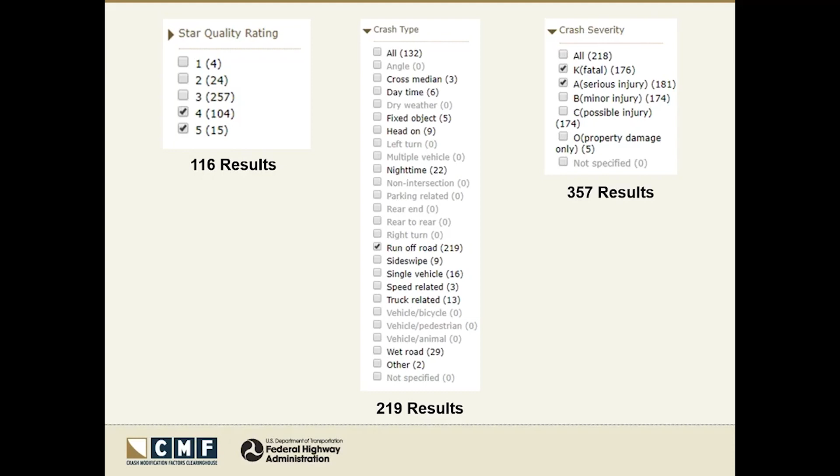Going forward, you may run into instances where you find multiple CMFs for the same crash type and severity in the study. It's very important to understand the differences between such CMFs and how to differentiate between them.

Let's give you an example. Here you can see there are two CMFs for total crashes in the same study for providing a left turn lane on one major road approach in urban areas. To make it easier to identify the difference, if you look at just this search screen, you cannot figure out what the difference is, because they both deal with total crashes with all severities in urban areas. However, there's a difference in points between the two CMFs: one is 0.73, one is 0.76.

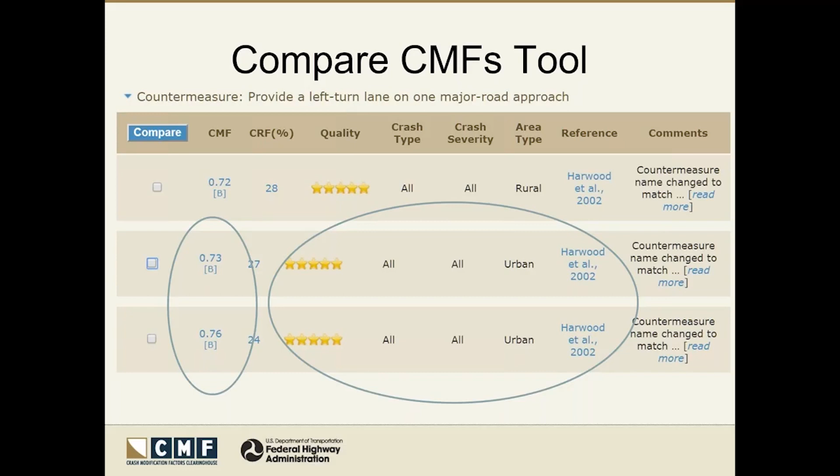You can identify differences in such cases by using the Compare CMF tool available on the Clearinghouse website. To compare, simply check the boxes corresponding to the CMFs you want to compare and hit the blue compare button at the top left portion of your screen. Once you do that, you'll have a screen like this, where the blue highlighted rows identify the differences between the two CMFs.

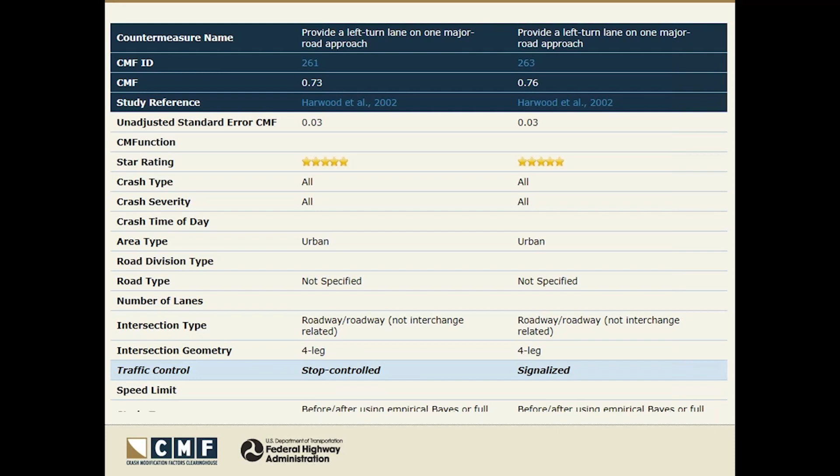In this particular case, you can see that one of the CMFs, for providing a left turn lane on a major road approach, looked at stop control intersections, whereas the other one looked at signalized intersections. So now we know what the 0.73 CMF applies to and what the 0.76 CMF applies to specifically.

In some cases, differences might not be obvious from the data fields available in the Clearinghouse. Rather, you will have to look at the comments box where the reviewer enters important notes about the CMFs.

So now, our third question will talk about calculating the reverse treatment effect. Let's assume a scenario where a study indicates a CMF of 1.48 for a 75-degree intersection compared to a 90-degree intersection. The question here is, what is a reasonable assumption of CMF for realigning an intersection to 90 degrees?

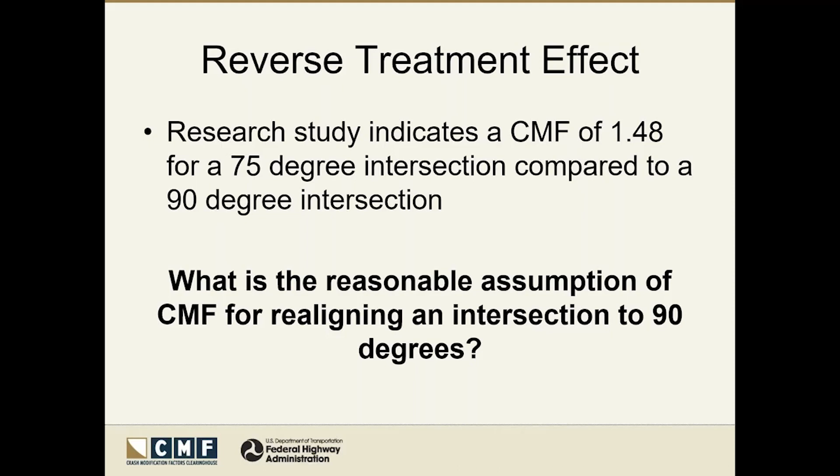Assuming that a 1.48 CMF would lead to a 52% reduction in crashes when an intersection is realigned to 90 degrees, maybe because 2 minus 1.48 is 0.52, is incorrect. It's a mistake.

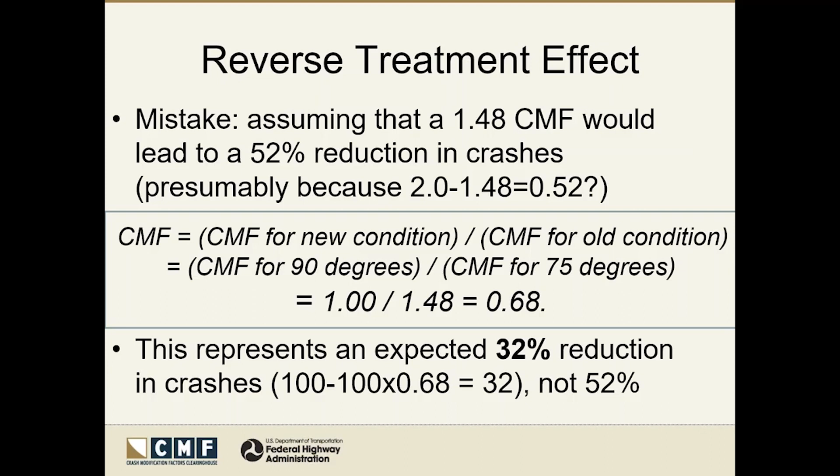The correct way to do it is the CMF is generally calculated as the CMF for the new condition, which in this case would be the CMF for 90 degrees, divided by the CMF for the old condition, which would be the CMF for 75 degrees. So in short, you get 1 divided by 1.48, which is 0.68, and effectively that shows you'll have a crash reduction of 32%, not 52%. We should be very careful when trying to imply the reverse effect of any treatment, and make sure we use the right methodology to do so.

Now let's talk about applying too many CMFs without accounting for interrelationship of effect. Various CMFs in the Clearinghouse address the same crash type. For example, you can have CMFs addressing run-off-road crashes at curves, and there can be various countermeasures that address run-off-road crashes at curves.

That can include chevrons, wider edge lines, or high friction surfacing. Now, of course, these effects are related, but we have to understand that they are not independent of each other. So how do you deal with it when you have multiple CMFs available?

One of the options is you multiply the CMFs together, which would likely end up overstating the benefits of those treatments. So accounting for interrelationship of effect becomes very important.

We can also take a conservative approach where we use the CMF from only the most effective treatment. I won't dig deep into this in my presentation because there's more detailed discussion on this topic coming up in the next presentation, and you'll learn more about how you can combine multiple CMFs to get a combined treatment effect.

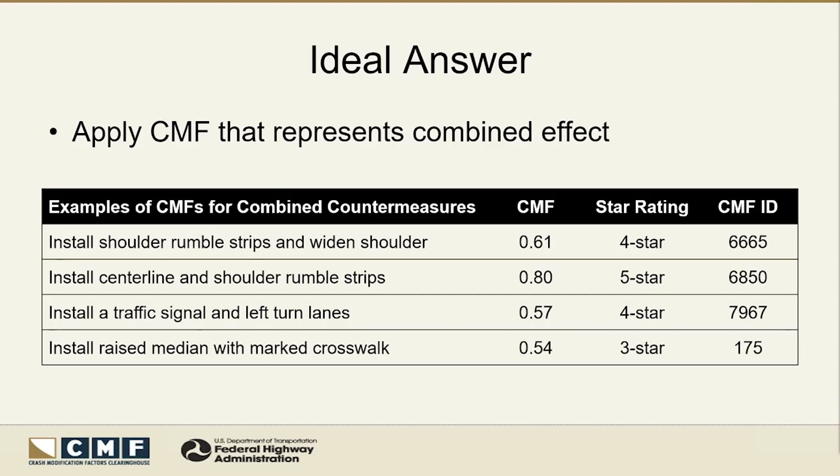In reality, though, we don't always have that ideal scenario, and you may need to use multiple CMFs for the individual countermeasures to estimate the combined effect. As far as I can tell, there are not CMFs available for the combined effect of these individual countermeasures.

If you wanted to install, say, a left turn lane and improve intersection sight distance, you're going to have to somehow combine or use the individual CMFs to estimate that combined effect. So we have CMFs for installing left turn lanes, we have CMFs for improving sight distance, but we don't have one for that combined effect. Really the question is how to estimate that.

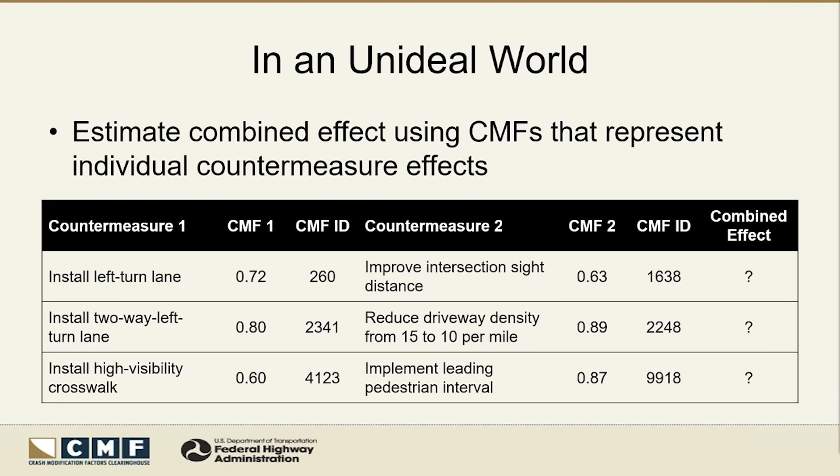There's a number of potential methods to do so, and the Highway Safety Manual suggests the multiplicative method—at least the first edition of the HSM does. The second edition is likely going to include the methods explained in today's presentation and in some other resources. But that multiplicative method was where we started, and it's relatively simple in that you just multiply the CMFs together, but the issue is that it may or may not be a reasonable estimate of the combined effect. So other methods have been proposed and considered, such as the additive method, the dominant effect method, and the dominant common residuals method. These may provide a more reliable estimate depending on the scenario at hand.

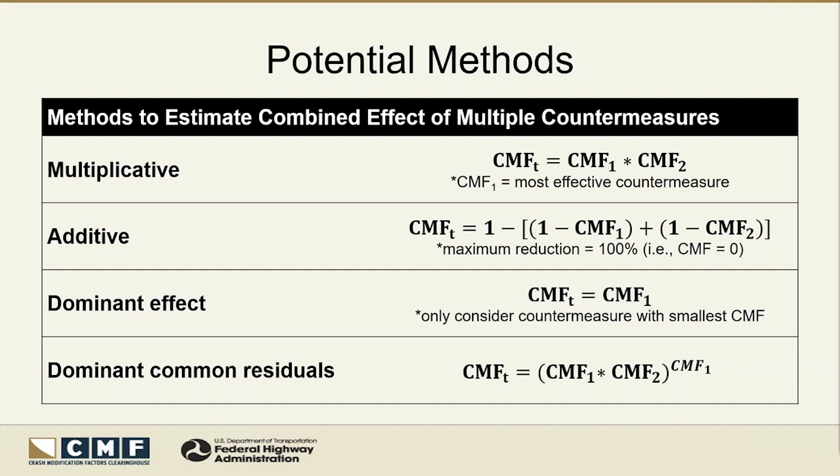So really the million-dollar question here is, when would you select one of these methods over another? I'll walk through a process to help identify and answer that question. Hopefully I can help shed some light on these different methods and when it may be appropriate to apply one over another. To find the most appropriate method, you'll need to follow this 4-step selection process.

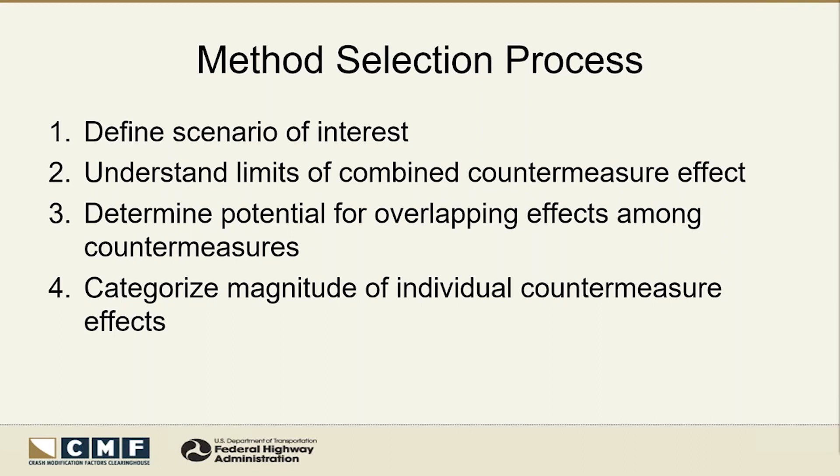The first step is defining the scenario of interest. In doing that, we want to not only define the countermeasures we're going to be using, but consider how they're going to be applied in that scenario. As part of this step, you'll need to define the general conditions, including roadway characteristics and traffic volumes, which help identify an appropriate CMF for those countermeasures. But for each of the countermeasures, you also want to define the target crash type and severity, and the applicable time of day—is this countermeasure applicable during the day, during the night, or both?

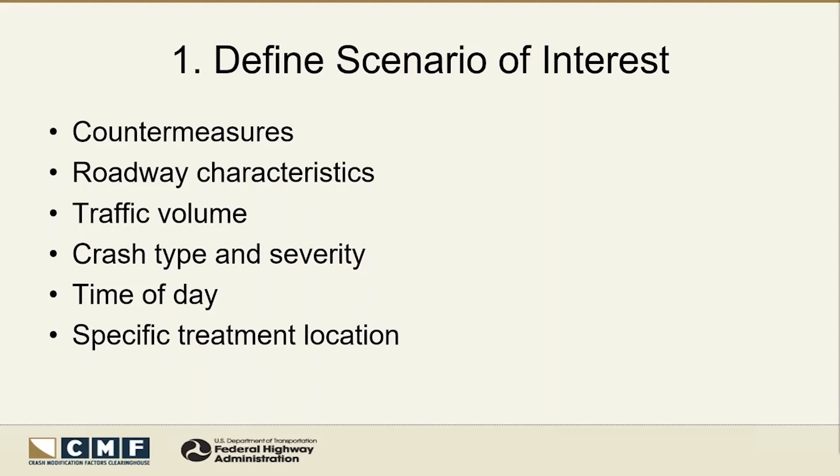And the specific portion of the road where that treatment will be applied - is this countermeasure applicable to the entire location, or for one direction of travel or another? For example, if you were planning to construct a roundabout at a stop-controlled intersection, that's going to impact crashes on all approaches, so that's an entire location impact. But if you were installing a treatment on one approach of an intersection, only for wet weather conditions, that may have a very local impact and not affect crashes on all approaches. So you want to consider applicable time of day and applicable location as well. That's really defining the entire scenario of interest and thinking about how the treatment could impact crashes.

The second part is to understand the limits of the combined effect. I'm representing some different scenarios here with different mathematical equations, and only one of these is incorrect as it applies to multiple CMFs. I'll go through each of these, but as you're looking through them, try to figure out which one may be incorrect when considering the multiple effects of treatments.

In case A, we see that 1 + 1 is 2. That's mathematically correct, and it's also correct in our scenario because you could recognize the full effect of two treatments. So let's say you have two countermeasures, you're expecting the full benefit of both. We would then estimate the combined effect as the full effect of the two. So case A is good to go - that's a correct answer.

In scenario D, 1 + 1 is 3. That's mathematically incorrect - we just said 1 + 1 is 2. But in this scenario, you could have that be correct if two countermeasures enhance the effect of the other. For example, let's say we're considering shoulder rumble strips and shoulder widening. These two countermeasures individually have a benefit, and together they might produce more benefit than the two individual effects combined, because the added shoulder width could provide more recovery room for drivers alerted by the rumble strip. So it may enhance the effect of rumble strips on a narrow shoulder - let's say D is a possibility here.

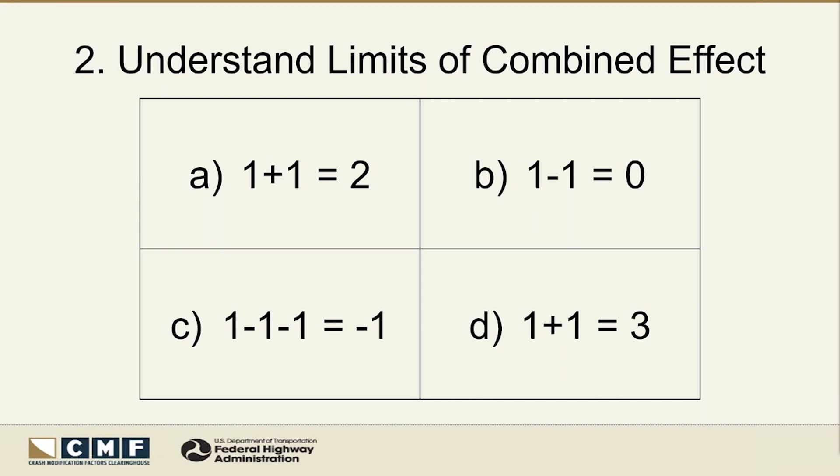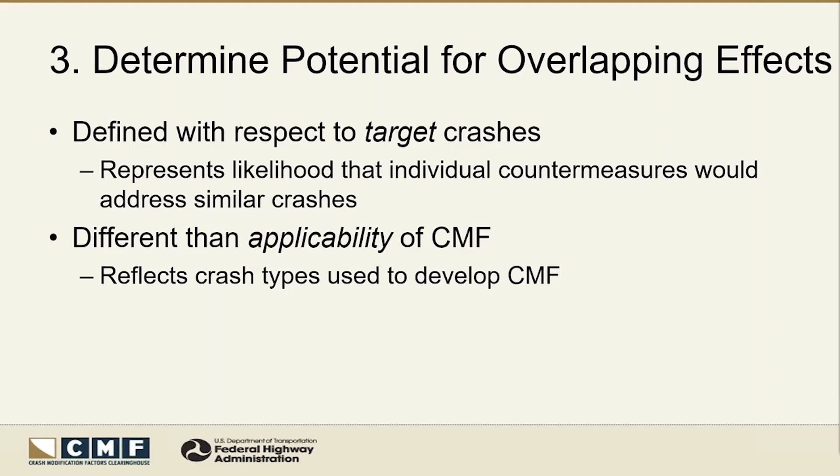Step 3 is determining the potential for overlapping effects, another critical part of the process. The potential for overlap is defined with respect to target crashes, representing the likelihood that two countermeasures would address the same crash types. The important distinction is that this is different from the applicability of the CMF - that's not necessarily the same thing as the target crashes of the countermeasure. I'll go through an example, but keep in mind the difference between target crashes and the applicable crashes related to the CMF.

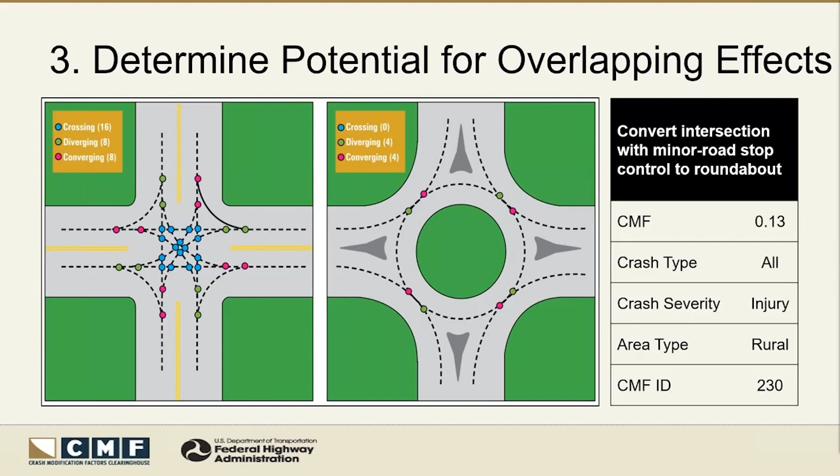In this example, let's say an agency replaced a minor road stop-controlled intersection with a roundabout, and what they're targeting are the angle crashes. With the roundabout, you're still going to have potential for sideswipe and merging crashes, but what you're really doing is hoping to eliminate the right angle crashes. Separately, a researcher develops a CMF that applies to injury crashes - so the applicability of this specific CMF of 0.13 is injury crashes. The target crashes, however, may have been something different, which in this case could be right angle crashes. That's an example of the difference between target crashes and applicable crashes as we move forward.

Continuing with the potential for overlapping effects, in this scenario let's say we're considering lighting on the major road and advance warning signs on the minor road, at a two-way stop controlled intersection. The question here is, do you think there would be no overlap, some overlap, or complete overlap? Think about that for a second. We have major road lighting and minor road advance warning signs.

I think in this case the answer is always it depends, and there's going to be a need for judgment here. But I think it would be appropriate to assume some overlap, because both the lighting and the advance intersection warning signs help alert drivers, at least those on the minor road, to the presence of the intersection at night. However, the signs will also alert them during the day, and the lighting would also have some impact on the major road. So they're probably not going to completely overlap, but there's likely some overlap here, and I wouldn't expect the full benefits of each because of that potential for overlap.

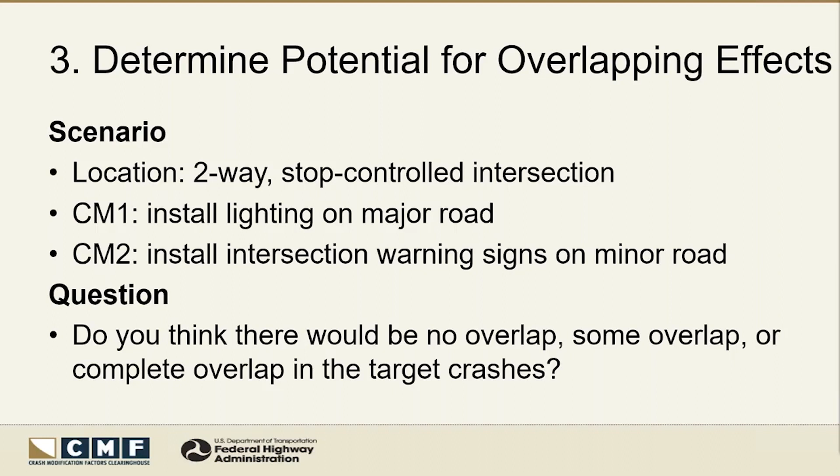So zero overlap represents two independent effects, and you're going to expect the full benefit of each countermeasure. That's what the multiplicative method assumes in the Highway Safety Manual - that the two treatments are independent, we can assume the full benefit of each, and we move on.

Complete overlap is when you have two non-independent effects, and the second countermeasure is really targeting some or all of the crashes that the first countermeasure was addressing. So if you widen the lanes and widen the shoulders, you may be targeting the same runoff road and opposite direction crashes - in that case there may be complete overlap.

I think in many cases you're going to have some overlap, and that's when both countermeasures provide a benefit, but the second countermeasure may have a reduced benefit because the first countermeasure had already addressed some of the target crashes. So let's say we installed a cable median barrier and shoulder rumble strips on the left shoulder or the median shoulder of a 4-lane divided highway.

In this case, the cable median barrier and the inside shoulder rumble strips would both target cross median crashes. But there may be some added benefit here because the shoulder rumble strips are also going to target the runoff road left crashes that would not have resulted in a cross median crash.

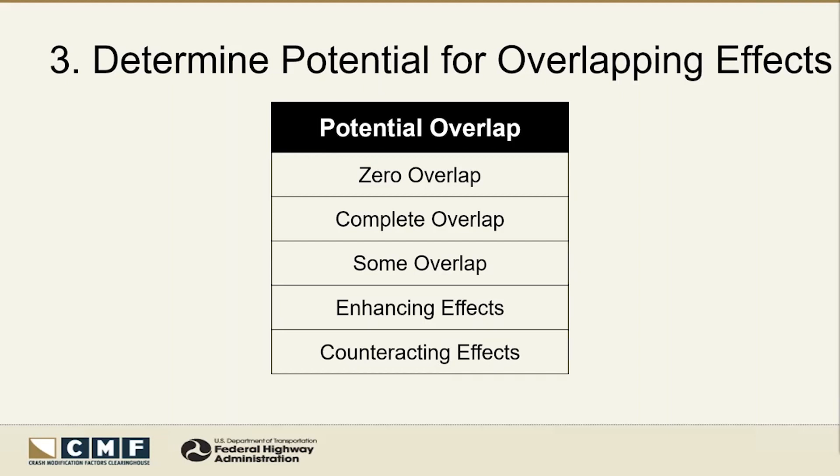But on the contrary, you could also have counteracting effects, which is where one countermeasure negates the effect of the other. Let's say it's not necessarily a countermeasure, but we were faced with a design exception and had to reduce the radius of a curve, but then we installed advanced curve warning signs and chevrons to counteract that - I would consider those counteracting effects. So keep those in mind as we move forward.

Here's another example of that. So we have two scenarios here, but to determine the potential overlap, you really have to consider the crashes and the locations that are targeted by the countermeasures. There's going to be more potential for overlap if the individual countermeasures either target the same crash types or are applied to the same locations.

So again, take the example on the left: if you were installing advanced intersection signs on the side roads and improving sight distance by trimming the vegetation in all four corners, then there's likely a high potential for overlap, because both treatments target similar crashes and they're targeting the same approaches as well.

In this scenario, let's say you're considering two improvements on a multi-lane divided highway. If one of those improvements is a cable median barrier, that could impact crashes in both directions, and those would be your cross median crashes. Let's say you were also considering widening the clear zone on the south side. That's pretty much going to target the run-off-road-to-the-right crashes for vehicles traveling from left to right. So there may be reason to think there's pretty good independence between those two countermeasures because they're applied to different locations.

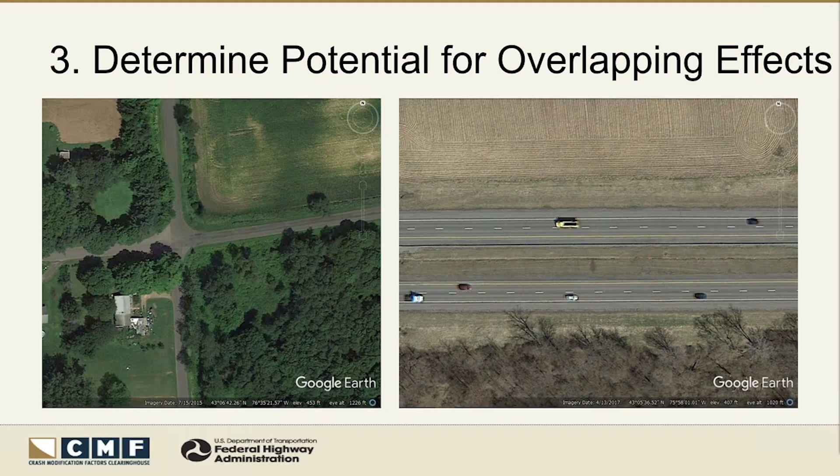So the last step of that four-step process, before I get into the methods more, is categorizing the magnitude of the individual effects. This doesn't have a huge impact on the method you select, but it's something to keep in mind. Depending on the magnitude of the individual effects, the method you select may have a nominal or significant impact on the combined estimated effect. If both countermeasure effects are relatively small, say a 5% change in crashes for both, whatever method you select probably won't make a huge difference. But as effect size increases, methods tend to produce much different estimates, and it becomes more important to select an appropriate method.

At this point, we've considered the potential for overlap, we've defined the magnitude of effects, and now we can use this table to select an appropriate method. This table assumes the CMFs apply to the same crash type and same crash severity. If they don't—if one CMF applies to total crashes and the other applies to, say, fatal and injury crashes—there's a different process we need to use, and I'll explain that in a bit. But let's assume we have two CMFs and they both apply to total crashes.

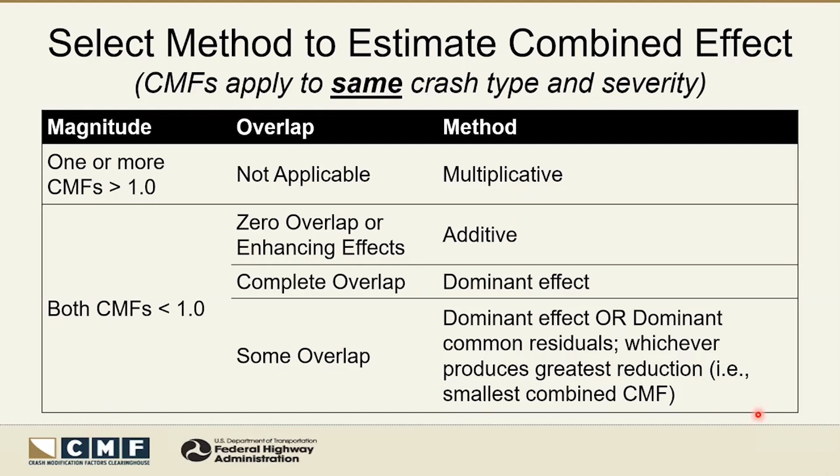Now, the dominant effect method tends to work well when both effects are large. That's not the case here—they're 0.8 and 0.89, I think. But let's see how this would play out. I'll go back to the next slide if I can do that.

In this case, the dominant effect method would select the CMF of 0.8. The dominant common residuals method, if we apply the equation, is CMF1 times CMF2 raised to the power of CMF1, where CMF1 is the larger reduction, so that's the 0.8 here. Applying that method, we get a combined effect of 0.76. Since 0.76 is a larger effect than 0.8, I would take the result of the dominant common residuals method and use that as my combined effect. That's how the selection process works.

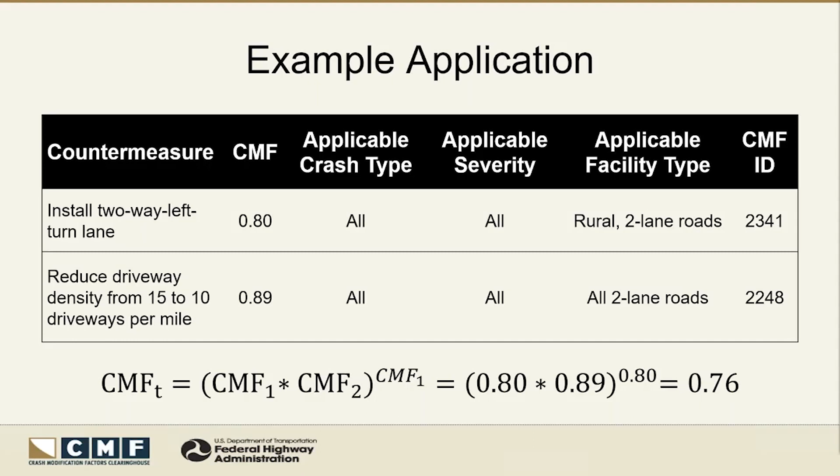So if the CMFs apply to different crash types or severities, you'll need to use this 5-step process. I'm not going to go through this in detail, but there are some additional resources that can help you out with this. The key is really to apply each CMF individually to any crashes related to that CMF. And if there are any crashes related to both CMFs, you would figure out which method to use from the previous table and apply that CMF to the overlapping crashes.

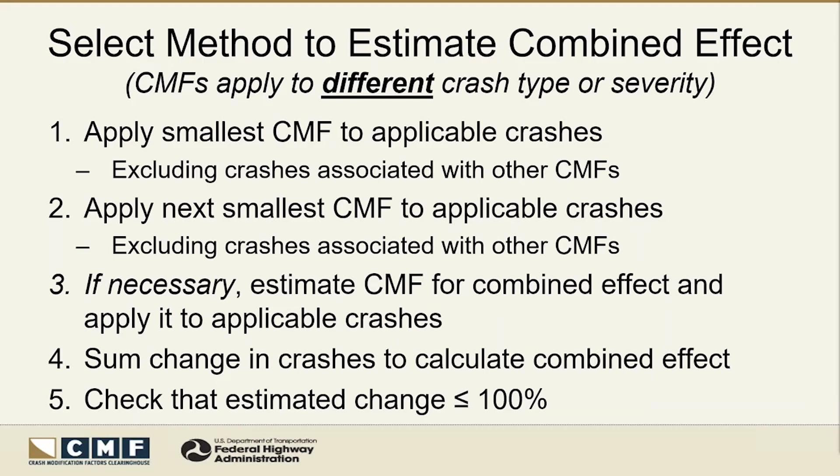I think an illustration might help explain that better. In this first graphic, the outer rectangle, the thick black rectangle, represents the total crashes for our site. We can divide those crashes into subsets or crash groups. In this case, we've divided into 2 crash groups, 1 and 2. Let's say CMF1 applies completely to crash group 1, CMF2 applies completely to crash group 2. We would apply those CMFs in parallel to those individual crash groups, and then combine the results at the end.

So let's say numerically, for an example, the total crashes at a location were 9 total crashes, broken down into 3 crash groups. Crash group 1 was 3 cross-median crashes, crash group 2 was 4 runoff road right crashes, and crash group 3 was 2 sideswipe crashes. We have our 2 countermeasures, countermeasure 1 and countermeasure 2. The CMF for countermeasure 1 only applies to the cross-median crashes. The CMF for countermeasure 2 only applies to the runoff road right crashes, and neither applies to the sideswipe crashes.

So what we would do is, just like applying any other CMF, we apply the CMF to the applicable crashes. The 0.87 is applied to the 3 cross-median crashes. The 0.93 is applied to the 4 runoff road right crashes. There's no CMF for sideswipe, so we assume no change in those crash types. We're just left with the 2 sideswipe same-direction crashes that were there before. So those are the crashes with treatment.

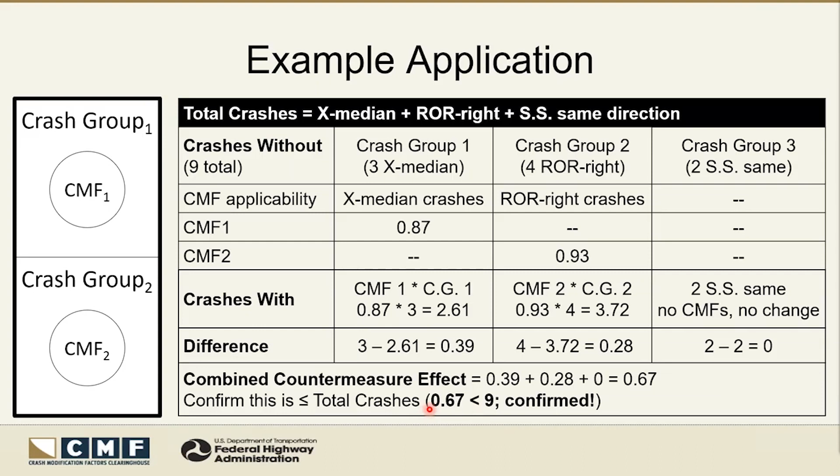0.67 crashes per whatever the study period may be. Again, the last thing is to confirm that that combined effect is not greater than the total number of crashes, which was 9 crashes. In this case, we're good. We assume a combined effect of 0.67 crashes, and we can carry on with our analysis.

All right, so just to wrap up, let's revisit the questions we started with. The first question: can you use CMFs to estimate the combined effect of multiple countermeasures? The answer, I think, is yes, but ideally you would use a CMF that represents the combined effect. Assuming that does not exist, then follow the process that we went through here to select an appropriate method and apply it accordingly.

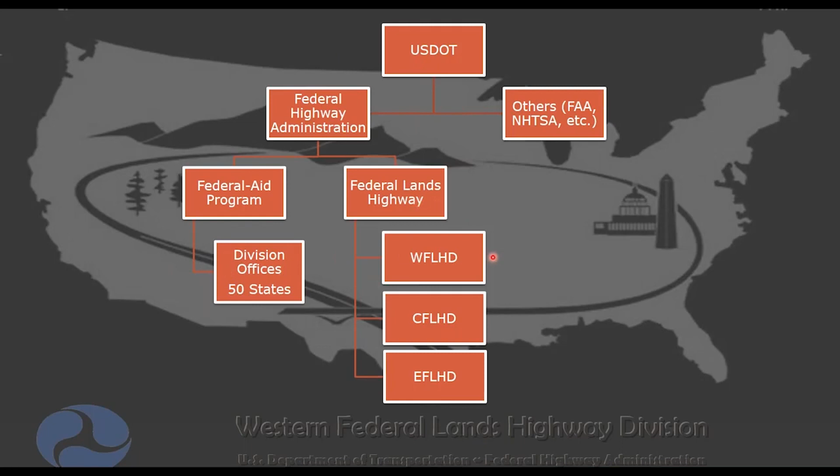So you can see here—my laser pointer out—we're under U.S. Department of Transportation, so others like FAA and NHTSA, Federal Highways. We have the Federal Aid Program that a lot of you are familiar with through the division offices. And then Federal Lands Highway has three main branches: Western, Central, and Eastern Federal Lands.

So where and who we work with: the programs our agency administers give us a wide variety of project partners. As you can see, the historic core of our program has been with our federal partners at the National Park Service, the Forest Service, and others such as the Bureau of Land Management and Fish and Wildlife Service.

In recent years, we've taken on more projects with fellow state DOTs and local agencies through the Federal Lands Access Program. So we have a lot of similar challenges when it comes to improving safety, as many of you face, with questions of how to improve safety for some very low to low ADT roads, very mountainous, rugged, and hazardous terrain, and lots of competing interests for transportation funding. We also have very context-sensitive challenges in some locations where the aesthetics and preservation of the nature of the land is very important.

So moving on to how we are using crash reduction factors here at Federal Lands. We'll talk about the CRF spreadsheet we use, how we use it to calculate the preliminary and final CRFs, while promoting proven safety countermeasures to drive safety improvements.

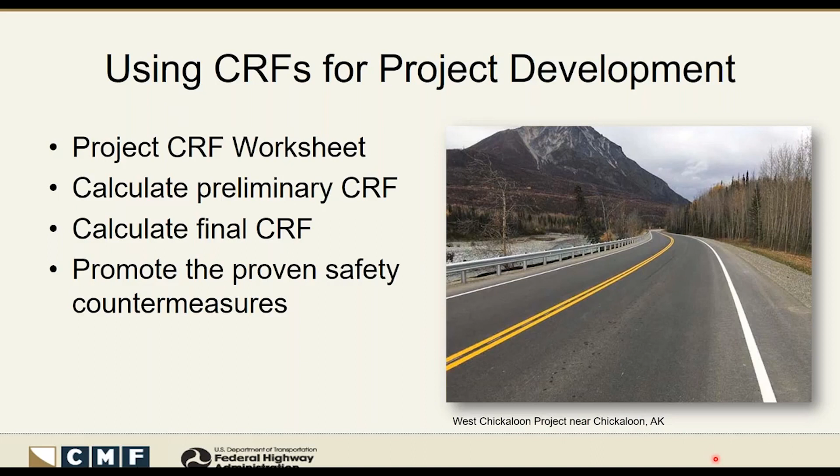And you've probably already noticed we use the CRF terminology a bit more here at Federal Lands. It's easier to communicate with others when talking about crash reduction with people who may not be as familiar with CMFs and the like.

Similar to what some or many of the state DOTs out there use for their highway safety improvement program, we have a list of our most commonly used CRFs included in our worksheet. The list is based primarily off the CMF Clearinghouse, but also includes other sources such as the desktop reference and Federal Highway's Every Day Counts literature.

We've strived to be consistent on the types of crashes and severities of crashes that the CMFs apply to, with a goal to have the total project CRF apply to all crash types and all severities. As many of you know, there isn't always the ideal CMF you're looking for as far as type and severity. So it's not perfect, but it is serving a purpose for our agency here.

So we calculate an improvement CRF for each improvement type on the project. I've got a hypothetical project shown here with our spreadsheet. For this project, we are looking at installing advanced curve warning signs, and we have the CRF shown here, which should be shown in a percentage. We expect a 30% reduction here for installing advanced curve warning signs.

And we apply a basis of length so that we can calculate an improvement CRF and then apply that to the total project. For this case, we're estimating that the curve warning signs on this project will give a crash reduction of 2.3% overall for the project.

Each applicable project safety feature is input into the worksheet, and the resulting total CRF for the project is determined based on the top three most effective CRFs.

Following Frank's presentation here, we're going to maybe want to complicate our spreadsheet a little bit. We were joking about that here in our room locally.

But each applicable project safety feature is input here. And so we've also added in the safety edge for this project for the whole length of the project, which results in an 11% reduction in crashes.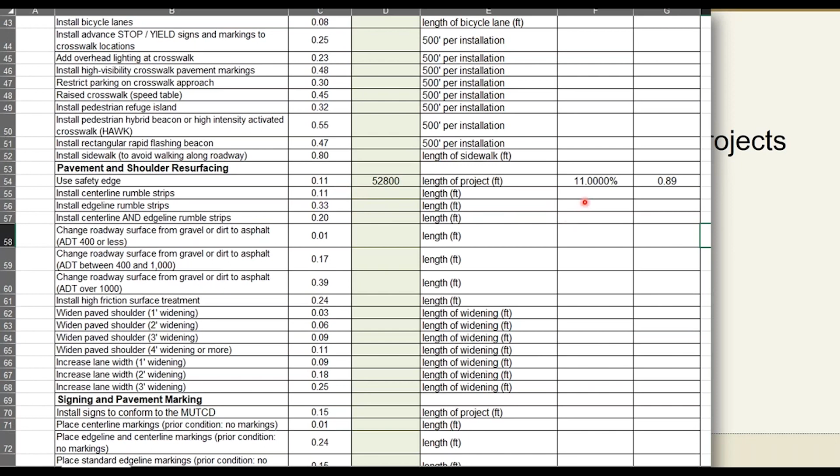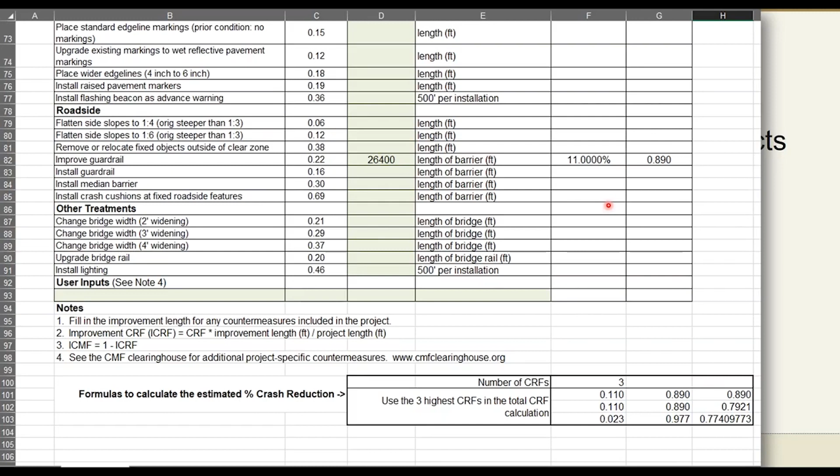And lastly, we have an improved guardrail CRF as well, for which I just put in half the project here, so 22% becomes 11% here for the project improvement CRF. Again, the top three CRFs are used to calculate the resulting total CRF. In this case, I just have 3 entered, and our resulting total project CRF becomes 22.6%.

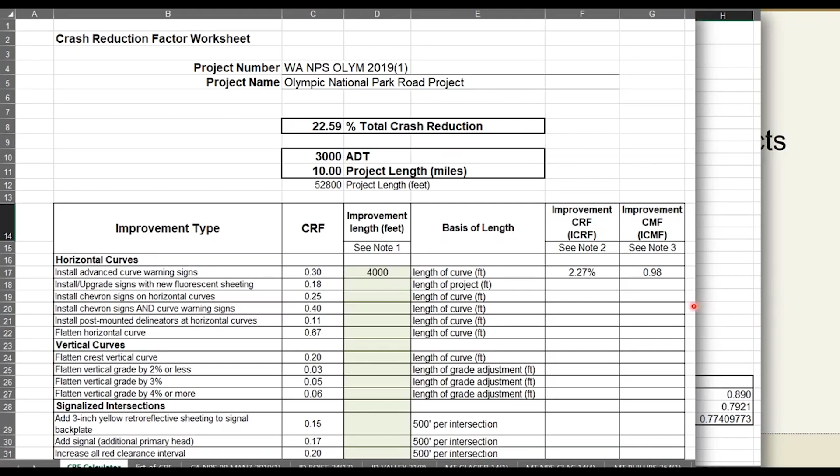And like I mentioned, we'll be taking a look at Frank's presentation and seeing what we may want to take and use here to improve this process. But we'll see how this has been beneficial for us as it is.

So when are we calculating the project CRFs? First, we want to calculate the project CRF as we develop the preliminary engineering milestone, typically a 30% plan set. Our safety engineers provide early recommendations for safety features to be included with our projects based on the project's traffic, existing safety concerns, the proposed geometry and roadside design, and context of the roadway.

Even if exact areas of barrier and, say, the use of warning signs are not fully developed by 30%, or it's known that the alignment may shift some, the preliminary project CRF is estimated to help show the relative effect that the project will have on reducing crashes.

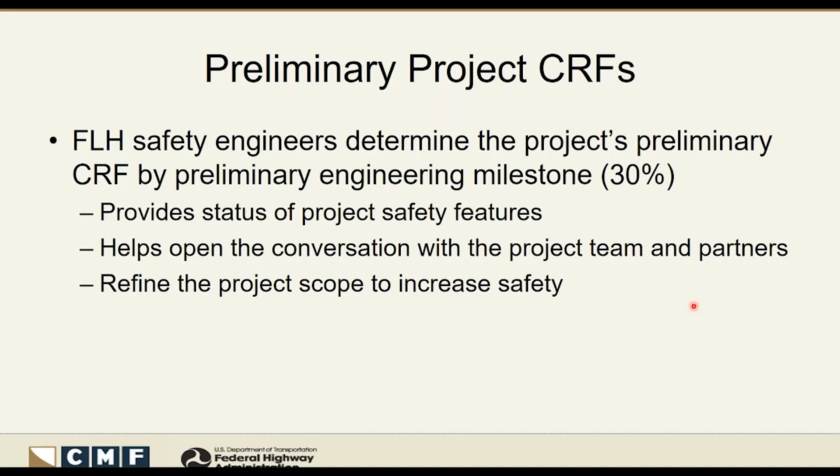By calculating the project's preliminary CRF and including it with the 30% milestone review documents, our project team and our partners, such as the National Park Service, Fish and Wildlife, state DOTs, or counties, can have a productive conversation on how the project is helping reduce crashes and identify further countermeasures or other ways to improve safety and operations on our projects.

After project development is complete, our safety engineers update the crash reduction factor worksheet to determine any differences from the preliminary countermeasures. The final project CRFs then get used to determine our business measure. If a safety feature dropped out of the project unexpectedly, we can review why this happened and see how we can prevent that from happening next time.

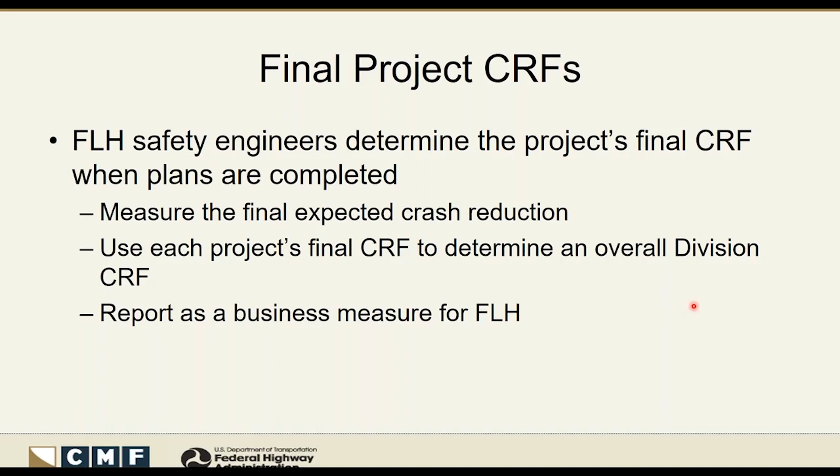So now I'd like to go over how we are looking at our project CRFs at a program-wide level. For a number of years now, we've had a business measure at each of our 3 divisions to track our overall crash reduction factors. In order to combine each project's crash reduction factor, our team has recently begun weighting the CRFs based on factors intended to get a sense of the exposure of the project to the traveling public, so that projects that are longer and have higher traffic have a more significant effect on our total weighted average versus shorter projects with lower traffic.

We do this by using the project ADT, length, and the project CRF to get a sense of its exposure, and you can think of that as being similar to calculating a crash rate.

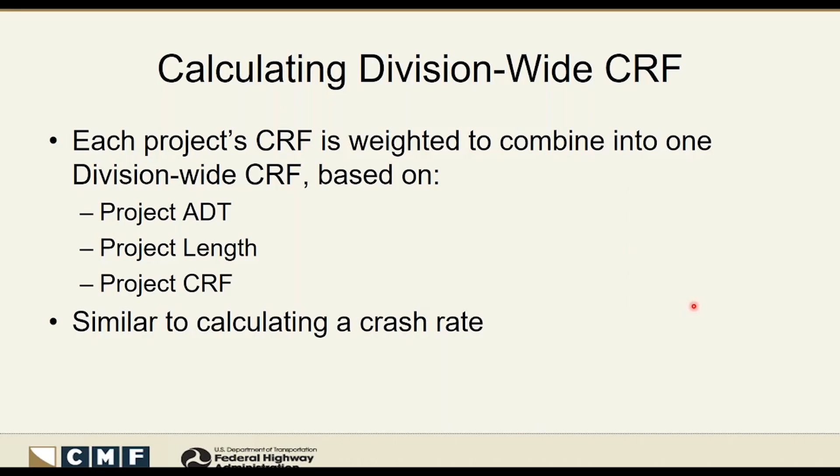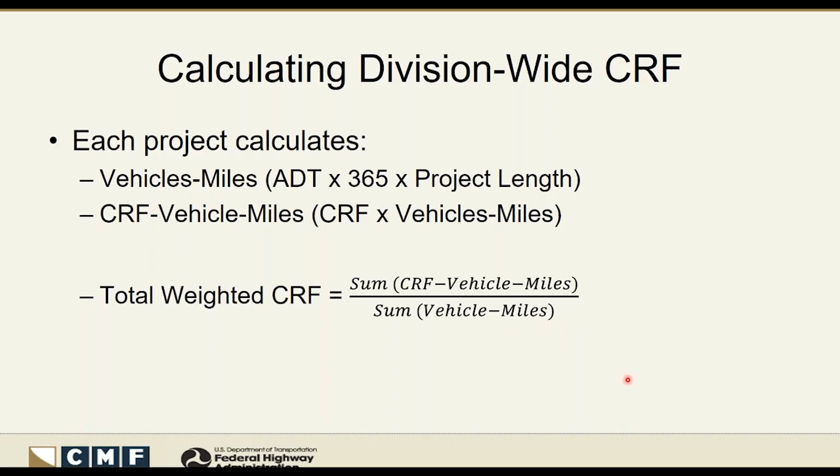So this is what that looks like. We multiply the project ADT times 365 days per year times the project length to get a vehicle miles value. Then we multiply the project CRF times the vehicle miles to get that overall CRF vehicle miles value. To get the overall weighted total CRF, we sum all the project's CRF vehicle miles factors and divide by the sum of the vehicle miles factors. And the resulting number is then the total program crash reduction factor.

There are some projects that we do not calculate the CRF for due to the nature of those programs. For example, our emergency relief for federally owned roads, ERFO program, typically limits us to restoring the original conditions before the disaster, so safety improvements are rare in those cases. Some of our other projects may be parking lot enhancements or geotechnical stabilization projects, so traditional safety improvements are generally excluded from those as well.

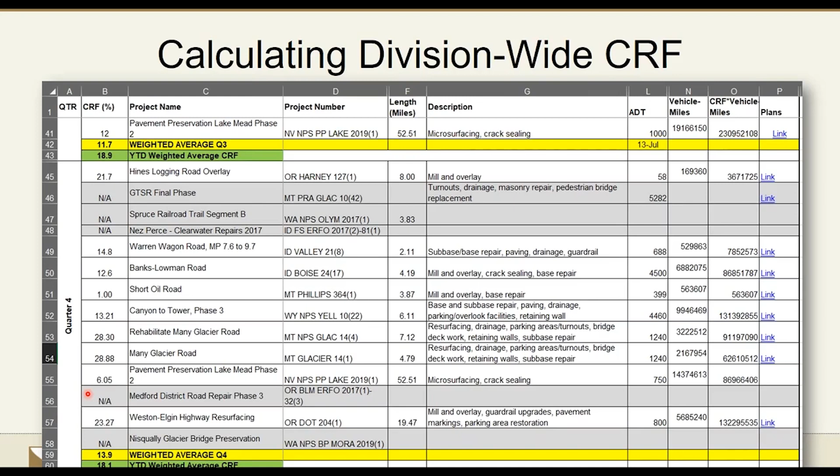So for fiscal year 2019, our division surpassed our goal of a 15% overall crash reduction factor due to the exposure of our biggest project on US 20 in Oregon with 17,500 vehicles per day and a larger CRF with multiple safety features on the project. That project allowed us to meet our goal itself. Without it, it would have been a 7% swing downward last year.

So in summary, there are, of course, some advantages and disadvantages to note with our approach to using CRFs to determine a program-wide factor. On the positive side, it's a reasonable method to track our safety improvements and help drive additional safety features during project development. By getting the safety countermeasures identified early in the development process, we have time to consider adding countermeasures before the project scope is fully locked down.

Once the individual project CRFs are determined, it's just a matter of organizing the data in spreadsheets to calculate an overall division CRF based on the weighting factors. So the weighting and combining part is pretty simple. This approach provides our agency's leadership with a business measure that helps acknowledge the work our agency does to improve safety on our projects and support Federal Highways goals. We can also filter the projects by our different program types or project types, such as rehabilitation versus reconstruction, to demonstrate how well we are doing with those programs or types of projects.

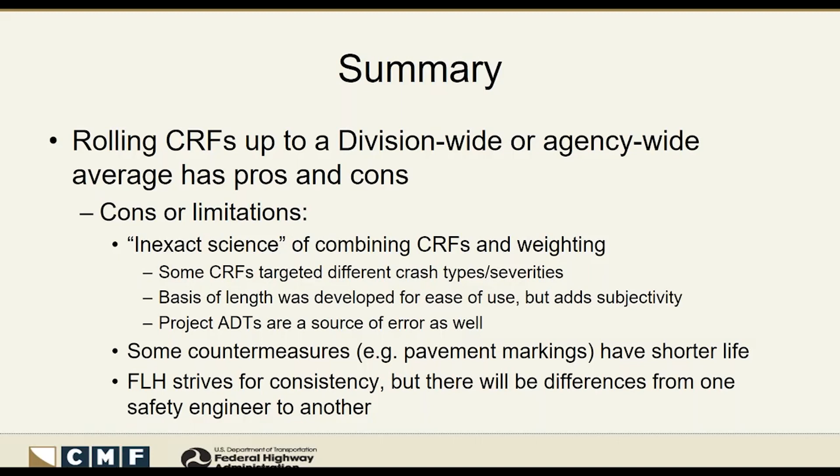Other challenges that some of you likely face are that some important countermeasures, like refreshing pavement markings or replacing with more durable markings, have a shorter life and require maintenance, something this isn't taking into account. It can be a challenge to determine how much credit to give for safety features like pavement markings, especially if the road already had some degree of pavement markings before the project. Finally, we try for consistency in our approach to calculating the project CRFs, but there will always be some differences from safety engineer to safety engineer when determining the project crash reduction factors.

So lastly, I'd like to turn it around and at the end of today's webinar, ask the audience for feedback on this approach for calculating an agency-wide weighted average crash reduction factor. We're certainly curious to know if anyone out there is doing something similar, to understand how your agency's projects are improving safety. Maybe it's at a district level, a region level, or maybe you've rolled it all the way up to a statewide level. And if so, how do you do it, and are there any best practices out there?

We'll be looking at some of what Frank had gone over in the presentation preceding mine and seeing how we can improve our method here while still trying to make it a practical way to compare CRFs across our projects and ultimately measure how our program is doing.

So overall, using CRFs is one way our safety team at Federal Lands Highway is working towards Federal Highway's goal to reduce transportation-related fatalities and serious injuries across the transportation system.

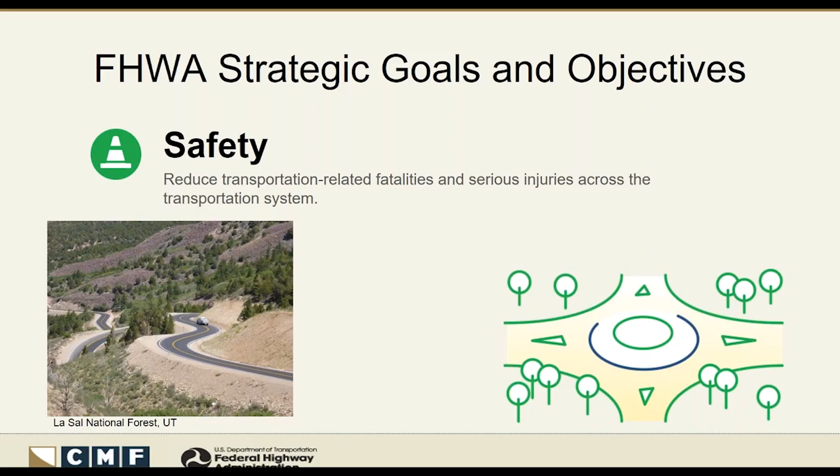I'll be happy to take any questions at the end of the webinar and welcome feedback on our approach to using CRFs. That's all I had.

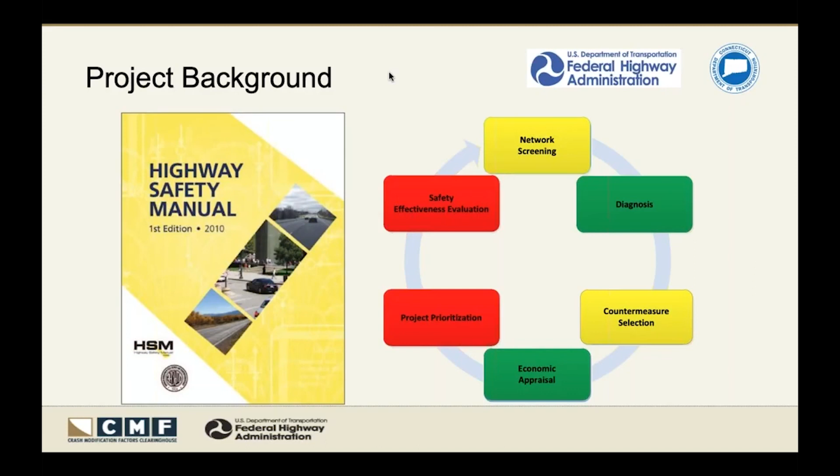As a product of this project, our team has developed a web-based application called the Connecticut Roadway Safety Management System, or CRSMS.

This is the interface of the first analysis module, network screening. Generally all the modules look like this - you'll see this further when I start demoing some of the components. Here you can see we have two major components: one is the data management component, which we use for processing the input data so it can be used for further analysis. The other is the safety analysis component, which has the 6 modules from network screening all the way to safety effectiveness evaluation.

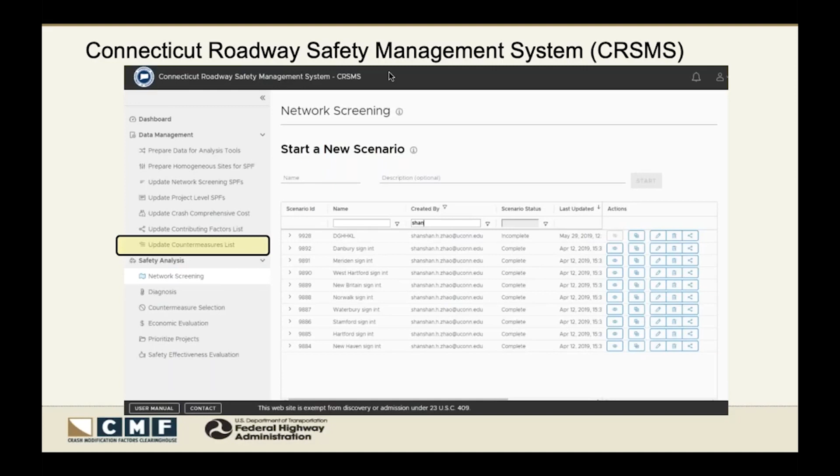For today's presentation, I'm going to focus on how we have managed to use the CMF Clearinghouse data and the API to keep our CMF Clearinghouse data in our database up to date, and how we have been using this data in the analysis.

As we mentioned earlier, before we can select any countermeasures that might be helpful to reduce crashes at a location, we need to figure out where the most critical locations are on our roadway network - those with the high potential for safety improvement. That's what network screening is doing.

After we figure out the high potential locations, we want to dive into those locations and take a look at the crash patterns, what might be the factors contributing to them, and what might be the safety issues at those locations. Once those are identified, we can move on to the CMF Clearinghouse or other sources of countermeasures that the agency usually considers, and compare and select the countermeasures that make the most sense.

So in our tool, we have this network screening module and countermeasure selection, diagnosis module built. This is just a screenshot of the result of a network screening scenario analysis. You can see we'll be able to show the top 250 sites with high risk potential for safety improvement, ranking them from high risk to low risk potential in your network, and show where it is and display the roadway condition at a particular location on the map. I'll show a result like this.

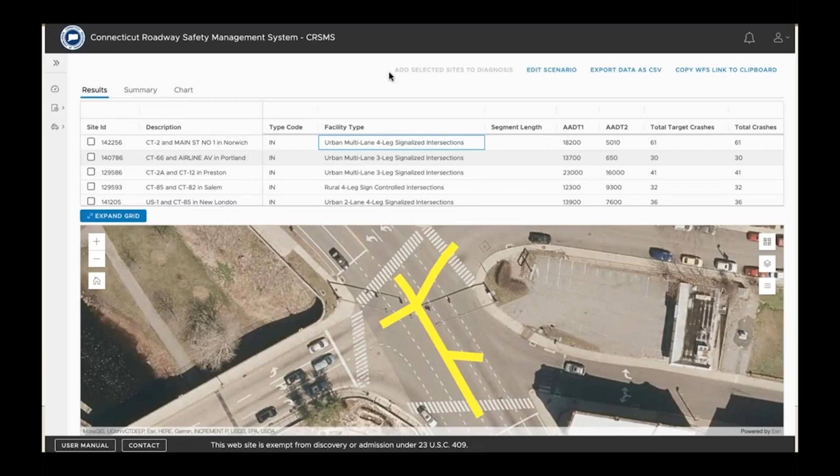So this is basically the end result of network screening. You'll get a list of locations with high risk potential for safety improvement, and it will allow the user to proceed ahead with any of those sites and further diagnose what's going on at those locations. And that leads us to the second module, the diagnosis module.

So we have provided several tools. You can see that in the middle of this page there are several tabs. One is the map showing the locations of the crashes at this site. For this particular analysis, it is a roadway segment running on I-84 between mile post 77.79 and mile post 80.74. You can see how many crashes are there and where they are located on this map.

In the other tabs, for example from the crash data tab, you can take a look at each crash individually. Basically any information related to the crash in the crash report, you'll be able to see it there. Other tools as well: crash summary statistics, test of proportions, collision diagram, crash tree. So all those are the tools that we've provided to the user of the CRSM system to facilitate with diagnosis.

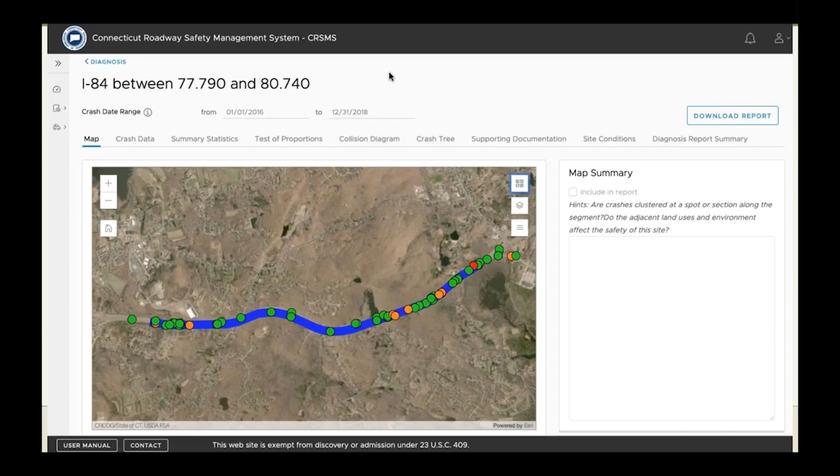So at the end of this module, the diagnosis module, the expected result is that the user should have gotten a good idea of what the issues are at this location, what crash patterns are there, and what might be the factors that contribute to those crash patterns. So with those questions answered, the user is ready to move on to the next module, which is the countermeasure selection module, and it is the one that I wanted to focus my demo on.

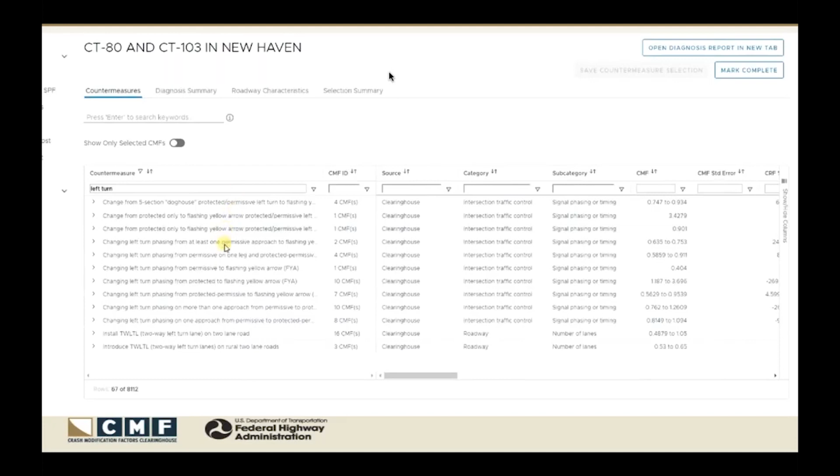So now with a shorter list, we'll be able to go over the countermeasures available and select the ones that we think are most appropriate to apply at this location. As you know, there might be multiple CMFs related to one countermeasure because it can be applied to different crash types, different severity, or the data may come from different states. So we choose the one that makes the most sense and is most suitable for our case.

Another way of searching is to use this filtering search bar. It searches against all the columns rather than just the countermeasure column.

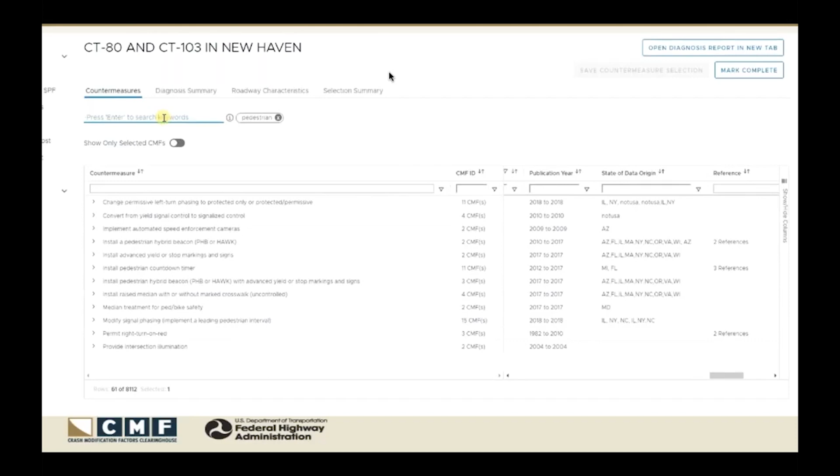Similarly, we'll go through the list and select the countermeasures and CMFs that are most appropriate for our situation. The user can also use the CMF ID as a hyperlink to go back to the CMF Clearinghouse and see more details about the study if they need to know more.

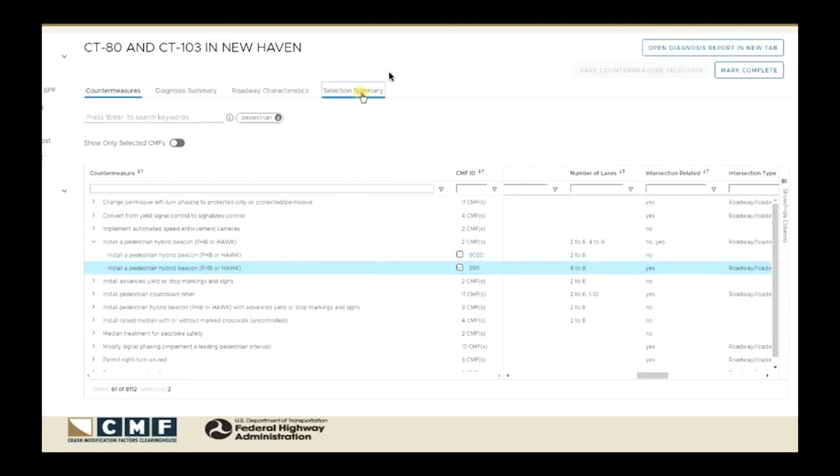With those CMFs selected, we can take a look. They are summarized here in this tab. The more you select, the more bits you'll see in this list. With that, we can mark this countermeasure selection step as complete.

Actually, the countermeasure selection is not complete. At this stage we'll still need to move on to the next step. With all the potential CMFs we've selected, we want to figure out which ones are economically justified, which ones have a higher benefit cost ratio, so that will help us complete the selection of appropriate countermeasures.

That's not going to be the focus of today's presentation, so I'll just quickly show you a couple of slides showing that our CRSMS tool also has these two modules. One is the economic appraisal, where the user can create one or multiple solutions, and for each solution they could include one or multiple countermeasures, and the tool will calculate the predicted benefits for the users.

Those benefits are calculated using project-level safety performance functions, as well as queries of observed crashes at this location automatically from the tool, from the previous 3 or 5 years of crash history. That information is calculated automatically, and the user needs to provide the costs of the projects. Then the benefit cost ratio is calculated, and different solutions are compared so the user can select which ones have the highest benefits.

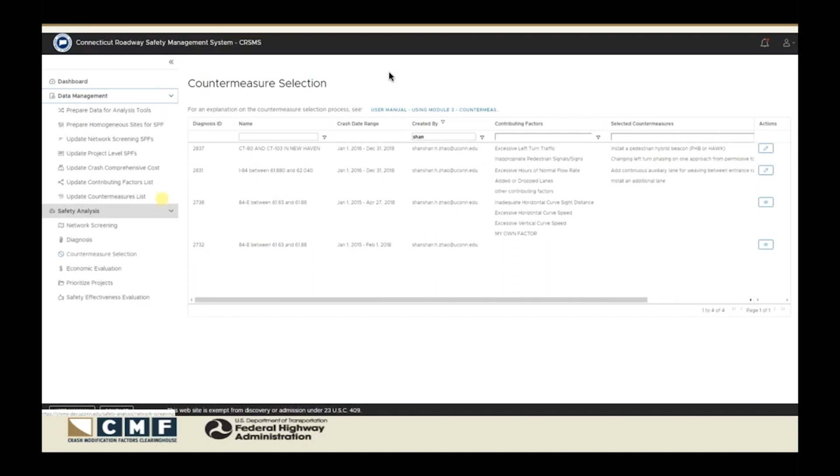The purpose of this component is that rather than relying on a dedicated database administrator to update the data, a high-end user or admin user of this tool can interact with this interface and update our database with the latest CMF Clearinghouse data, without bothering any developers or database admins.

So this basically wraps up how we have been updating our data with the CMF Clearinghouse API and how it looks in our data management module.

I think with that, that basically wraps up my presentation. This is a collaboration effort between Federal Highway, Connecticut Department of Transportation, our Safety Research Center, and our partner VHB engineers. So this is my contact information. I believe we're going to have our question and answer session in just a few minutes, so I'm happy to take any questions you have. And with that, I'll turn it back to Taha.

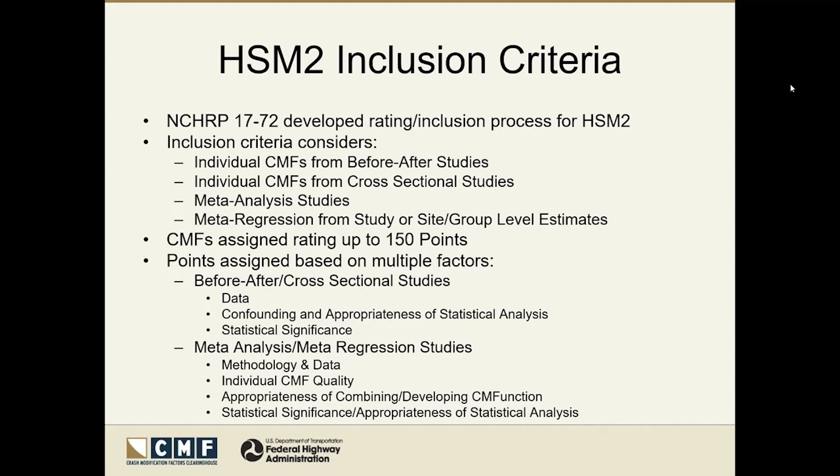For the internal facing activities, we hear from our customers, from some of you probably, that you like the star quality rating, you like that at-a-glance look to get a feel for the quality of the CMF, so we're going to maintain that feature. We will have to develop a method of providing star ratings based on the new HSM2 rating criteria, and we'll be working on that over the next couple of months.

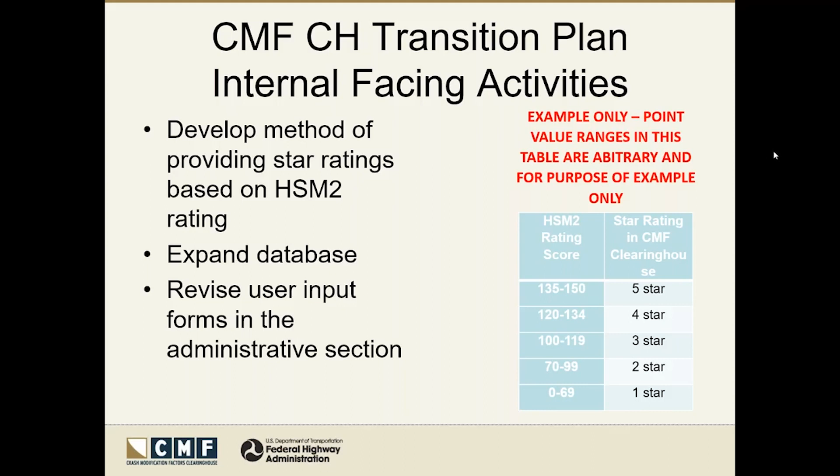As an external facing activity, your input is very important to us as we go through this process, so we'd like to hold some stakeholder calls so that we can better understand how this change will affect you. This is also a good opportunity for us to identify any concerns or potential enhancements that might improve your navigation and ability to search the clearinghouse.

So I would just offer that if you would like to provide input to this process, please let me or Taha know. We'll be on the lookout and searching for folks to participate in these stakeholder calls over the next couple of months. So you can either email us directly, or I think there might be a question on the evaluation to provide that input as well.

Otherwise, just stay tuned for additional information. We will be sure to keep you informed and up to date as we move throughout this process.